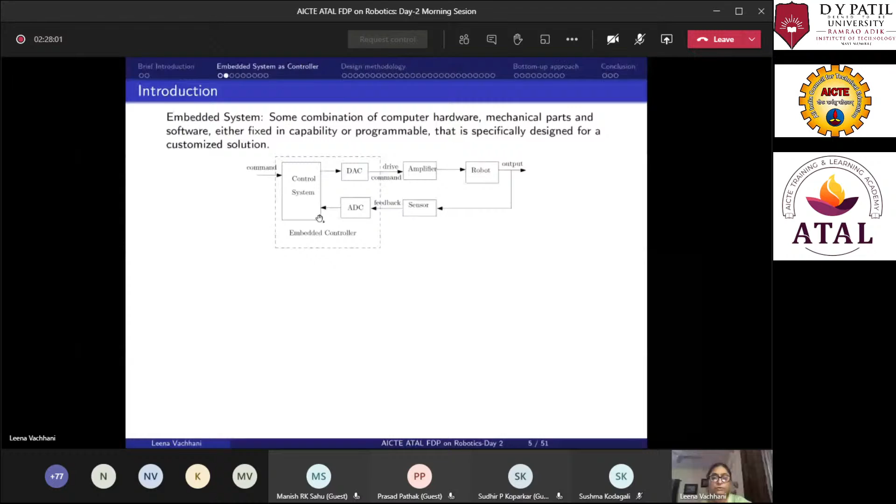So when we look into designing the control laws for the embedded platform, and at the same time when we have chosen that our controllers should stay in an embedded platform, what is the advantage that we get? The advantage that we get is a smaller semiconductor area. You are able to do the control system design. You don't need bigger computers and so on for computing. So you are basically saving on the semiconductor area. And our objective is anyway designing for small size robots.

So why do I have the communication with a bigger system? The laptop or any other computing system cannot be placed at the robot itself. So one has to look forward to designing it with some embedded platform, which is part of the robot's processor itself. Low power consumption, because that is something you are looking for for your battery life, your battery requirements onto the robot. That is also going to be carried by the robot.

So finally, you look for small size solutions, not only from the processor perspective, but from the interfacing as well as its added power requirements. So in all, one should look for getting a small size for the robot designs. One should look for its availability in the market; it should be easily available in bulk form, right?

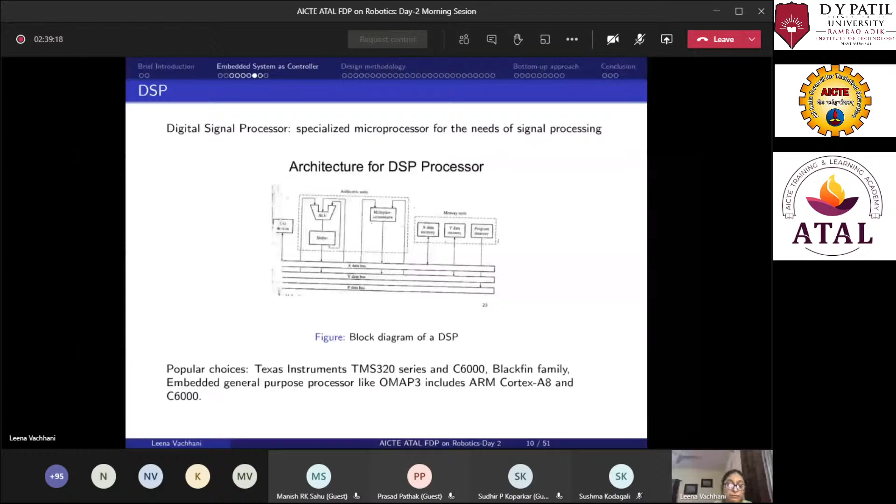Then there comes the category of embedded Linux, which is now very popular because instead of a laptop or a CPU with the complete Linux platform, this is a kind of compressed software. I see embedded Linux applications as compressed software applications where you basically have the Linux kernel and then you build the application layer you want. Like in FPGAs, where you are doing everything in hardware, here you have the same processor, but you bundle your software with the applications you want.

So whichever part of the software you want, you embed into the Linux kernel, then port it and program it in your processor. So that again gives you customized solutions. Of course, you need coding skills, you need interfacing, but interfacing with the sensors is very easy because there is a lot of open source software available. You pick up the software which is compatible with your version, and then get going. That's the whole idea here, making everything open source mainly, right?

But when we look into these embedded platforms, what is the main bottleneck? The bottleneck is about doing all the computations in the digital way, such that you are doing manipulations only with bits, and you have to make sure that you are aware of the limitations of these digital hardwares.

So whether you are doing the operations with fixed point or floating point, you should be aware of its limitations. For example, you have 10 bits of operations you have planned for, but in certain cases you have some operations requiring 11 or 12 bits. So what will happen is the condition of overflow, and then all your computations will go wrong. So the whole idea is about knowing what your digital implementation is looking for.

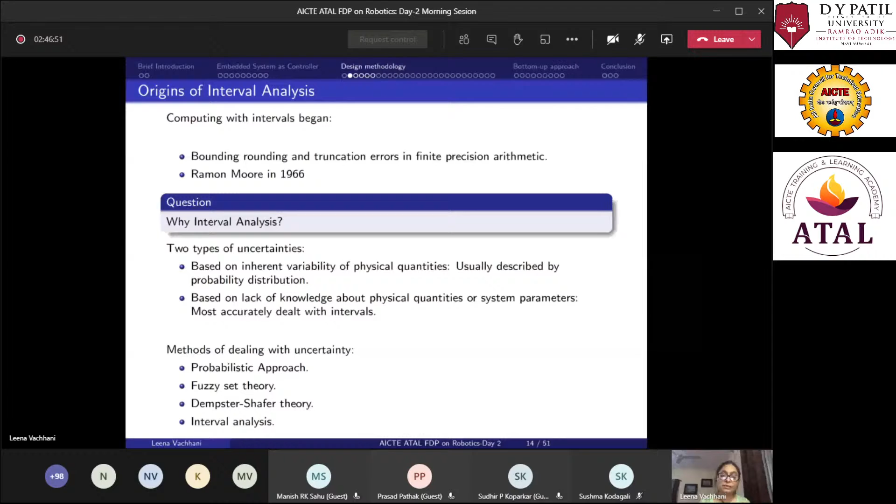Of course, when we are designing the interval methods, this is typically an iterative method, and we have to decide when to stop the iterations and so on, right? So let's not look into too much detail of these parts, but you will appreciate these particular benefits later on, once you see one of the methods where we have applied the interval.

So there are ways by which you can do interval analysis. Maple, Mathematica, MATLAB all support interval analysis, but we will not be using them. We will rather be designing our algorithms to calculate it iteratively and so on. So let me give you a gist of one kind of function that we will be using for defining the interval analysis, the interval functions and so on.

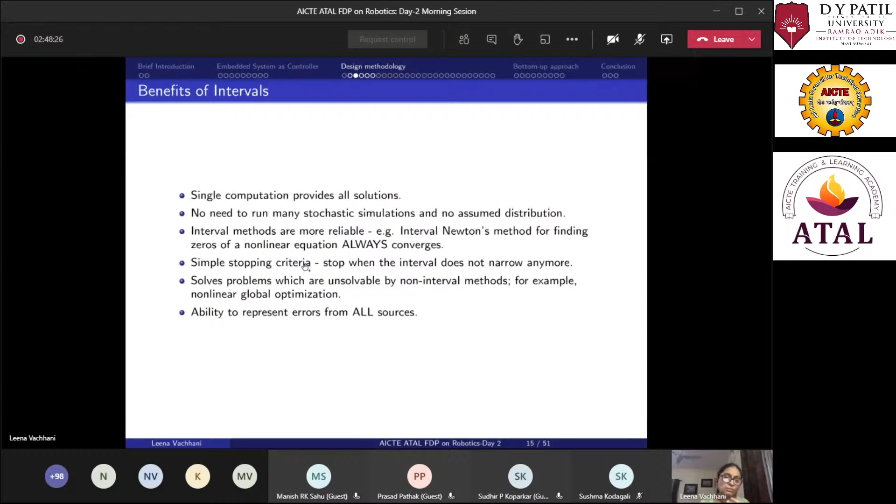For example, I have a variable x, and this x is a variable in 2 dimensions, x1 and x2. When I define the interval in these 2 dimensions, this will turn out to be a rectangular representation where its value is between x1 lower bar and x1 upper bar, and in the x2 dimension, its value is x2 lower bar to x2 upper bar. Now, if I apply a mapping to the y world, where the variables are given by y1 and y2, this mapping is with the help of this function. If I apply this function f on this interval, on all values within that interval in the x domain, I will end up in this gray area.

But now the output that I'm looking for is also to be represented in terms of intervals. So my answer should give me an interval in the y domain which is bounded by certain limits. If I apply the function bounds directly, I may land up in a bigger value, which is not desirable. That's why we should define certain functions such that we get an appropriate bound, just enough bound for all values within the domain, as you move to the y domain. So your range values should be mapped to bounded values in the y domain. That's the entire idea.

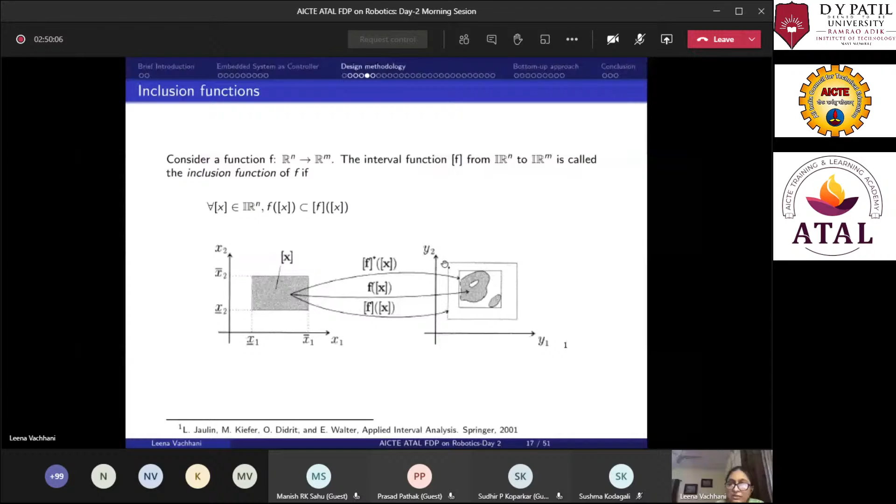So design a nice inclusion function such that all values of x in that interval map to an interval with just enough bounds in the y domain. So let's look into such interval computations. Interval analysis can be used for defining the true values and so on. Let me skip this slide and see where else interval analysis is used in robotics. It's used for defining manufacturing tolerances, sensor uncertainties, safety and guarantee situations, finite time, inverse kinematics, because we are talking about all possible solutions, motion planning, simultaneous localization and mapping, and we applied it for collision detection and avoidance, and that's what I am going to introduce you to.

Right. So here comes how we have applied the interval method. I told you that a pictorial representation of a two-dimensional interval turns out to be a rectangle, whereas if I define the interval such that it represents polar coordinates, there is a lower limit on the radius r, an upper limit on r, and a lower limit and an upper limit on the angle. So with respect to this xy coordinate system, my interval will look like a section of a circular disk, A, B, C, D, right? Because my interval describes the lower and upper limits of the radius, and the lower and upper limits of theta.

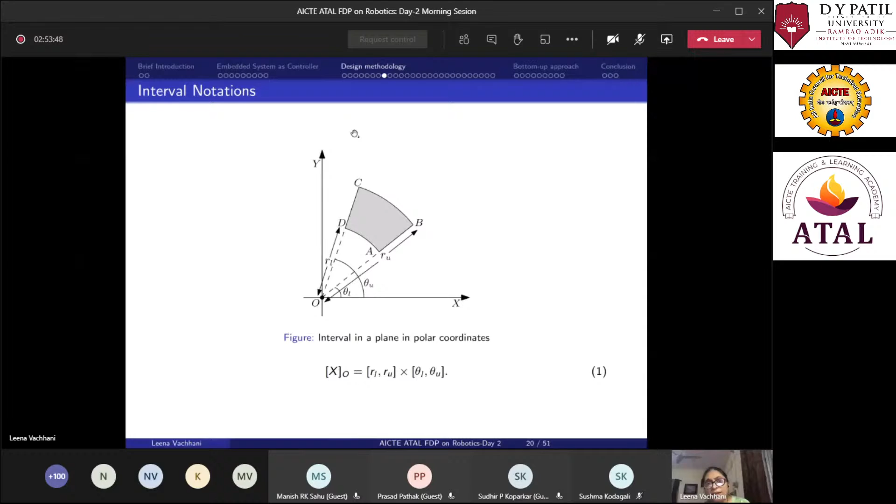Now, if the intersection is known, then I should be able to find out what is the collision free interval. And this collision free interval will tell me which are the permissible velocities of the robot which are not going to collide with the obstacle in that delta t time. So let's see how we did this. A very quick pictorial way of looking into how the iterative algorithm was developed.

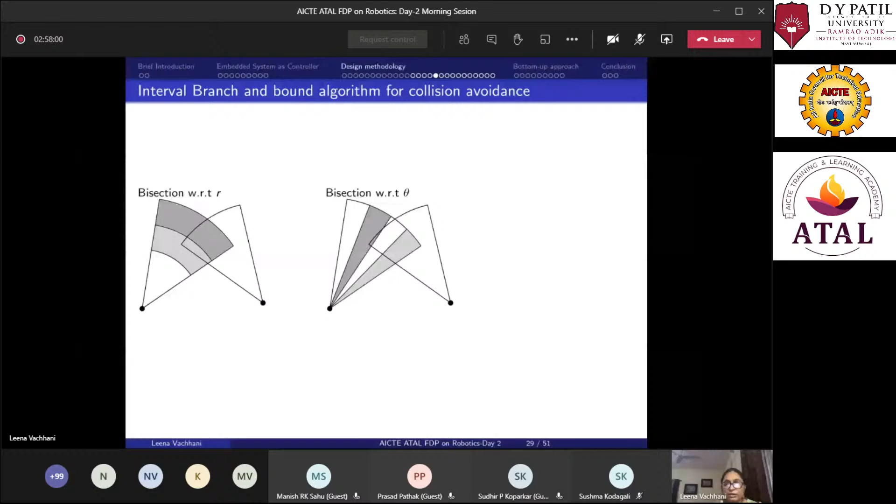As soon as it is FPGA implementation, and I know that there are those many dynamic obstacles or those many robots in the environment, I can have those many parallel blocks. And each of these parallel blocks is giving me an interval which is collision free. And I will combine these multiple collision free intervals to come up with a single interval which says that for that particular robot, this is the collision free interval and these are the velocities which are permissible and not colliding with that particular robot.

So this way, when you are developing an algorithm based on a certain technique, you know that you will be nicely able to implement it in the embedded platform which you have chosen. So here we started by knowing that we want to do multi-agent collision avoidance using FPGA. That's why the algorithm is designed such that it is using only addition, subtraction, and division by 2, right? Okay, so let me go back to my presentation.

I hope you were able to see my video. When I'm switching the screen, you are able to see the video? Yes, ma'am. Yeah. Okay.

So this was the design methodology using the interval method. Now I'll quickly go into the bottom-up approach. I'm just having 5 minutes left. So I'll tell you a controller design which is rigorously analyzed using nonlinear stability method. But now in this particular approach, we will look into designing the controller such that I'm using minimal computations. But the theoretical background is such that it is completely saying that okay, my controller is stable enough to be

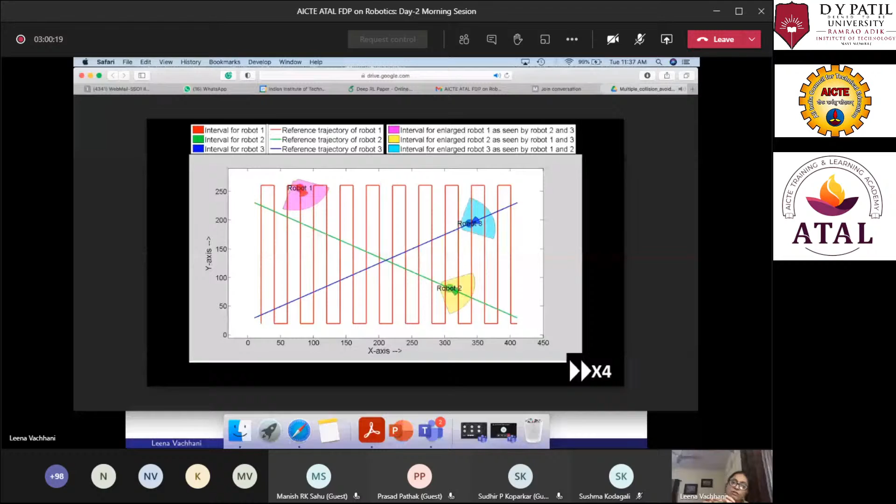looked into. Now, since my computations are small enough, we will say that it is suitable for implementing in any embedded platform. So even in the microcontroller, I will be able to implement it without any worries of quantization problems, because the computation requirements are very, very minimal. So with that objective, we designed this particular algorithm for spherical robots, but it is actually applicable to any unicycle model.

So we designed this algorithm to say that you have only 3 actions available: go straight line, steer left, or steer right. Okay. And of course, since our measurements are limited, it will have only position measurement available. So this particular state variable description is again in the form of the radius, basically in polar coordinates. But I will just simply speak about the idea and not go into the mathematics and further details of it. For example, you want to reach this particular origin.

So this is a navigation task. You are starting from this position P with an orientation V, and your objective is to reach this particular point O. And let's say the current velocity vector is given by this particular arrow with the v vector sign. So what we will look into is if this particular vector is in this particular quadrant or in this particular

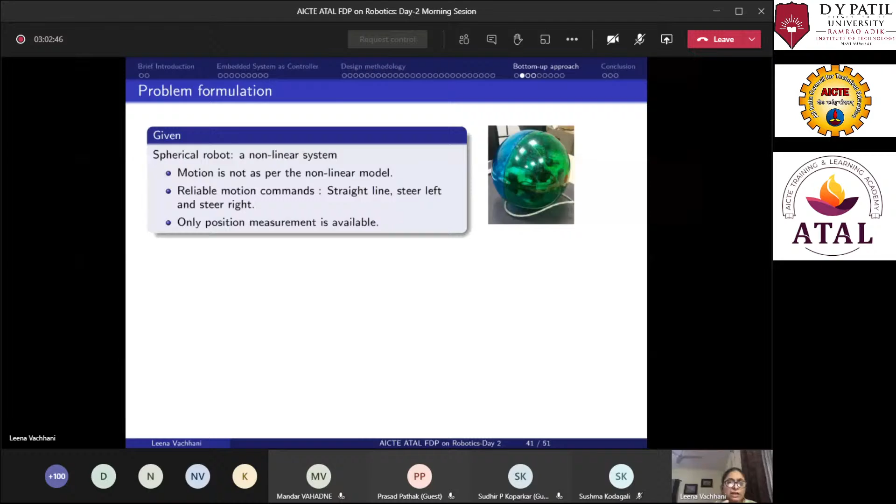But with the particular nonlinear analysis, we could say that this particular system is stable. And you see that what we used here is the linear velocity is constant and the angular velocity changes its sign, whereas the rest of the other quantities are constants. So whether you go right or left depends upon where your position turns out to be with respect to this OP line.

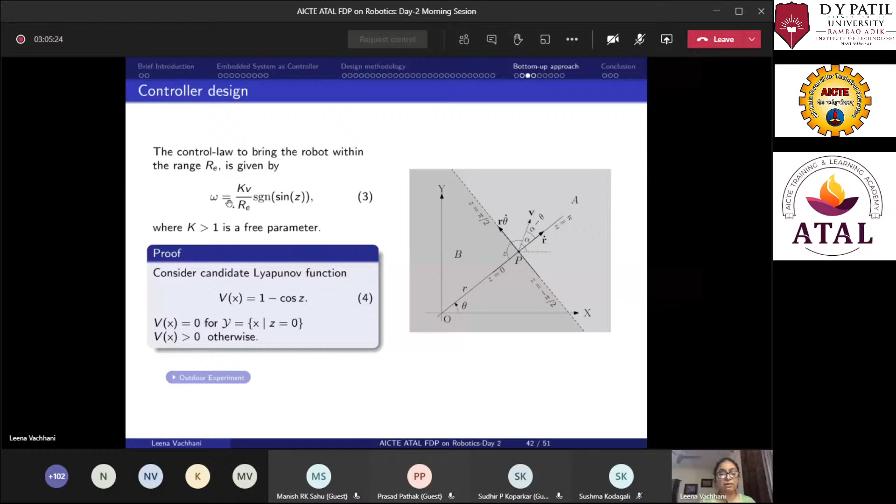And at the same time, we said that these agents are not communicating with each other, whereas each of these agents has some sensor which is able to see within that particular field of view if there is any other agent or not. So in this field of view, if an agent turns up... for example, let's start with this particular jth agent. In this particular field of view, there is no agent, so it will go into this particular destination. So that's called the free subsystem.

For example, you're talking about the ith agent. Then this ith agent has the jth agent in its field of view, and there is a possibility that it will collide with the jth agent. So it will be in the engaged subsystem, where the control law will be the combination of repelling from this particular agent and going towards this. So both the objectives, right?

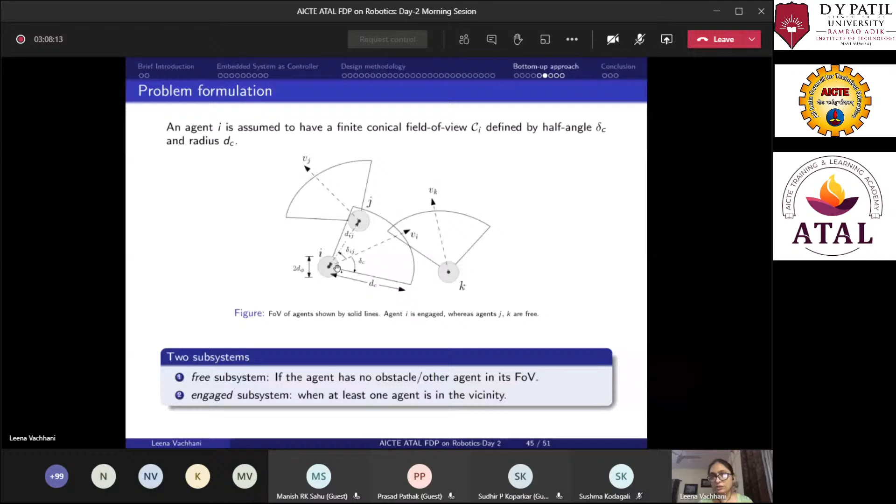Since the stability was already proven, we perturbed some number of agents. They were able to once again come back that particular way. So the idea here is that theoretically, if you are strong, you will be able to apply it to multiple places. At the same time, the entire control design was such that it is very simple and you would be able to implement it on any simple embedded platform. So the approach here was not to see which platform to use, but to design a control law which is simple enough to be implemented on any simple microcontroller as well. And once it is a microcontroller, then you can have a microprocessor or FPGA or whichever way you want.

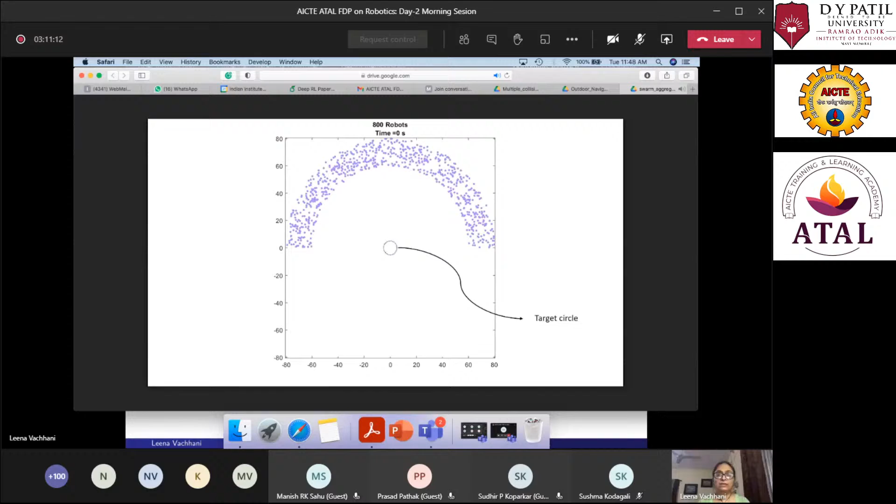So concluding from the embedded system perspective, we can see that there can be two approaches for the embedded implementation. One is that your controller design should turn out to be very simple. And then one can look into designing specific algorithms which are designed for specific embedded platforms, right? So in these two ways you should be able to address the limitations of